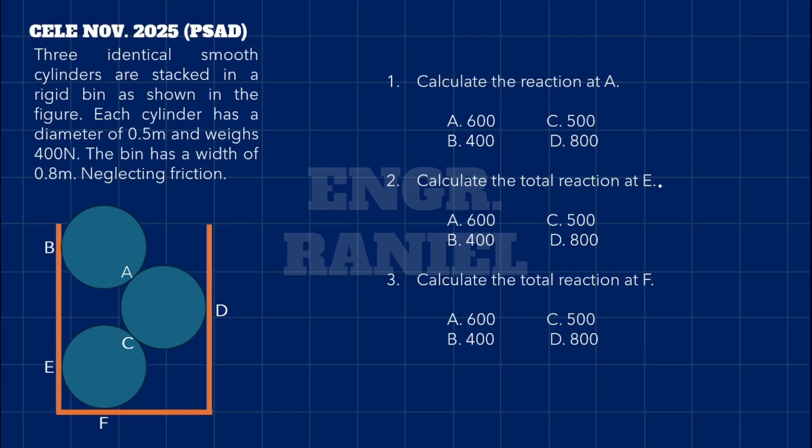May problem tayo dito na lumabas noong CELE November 2025 under PSAD. So ito yung problem guys, and ito yung given na figure. So ang sabi sa atin is may 3 identical smooth cylinders are stacked in a rigid bin as shown in the figure. Each cylinder has a diameter of 0.5 meters and weighs 400 newtons. The bin has a width of 0.8 meters and neglecting friction. Ito yung mga katanungan guys. Calculate the reaction at A, calculate the reaction at E, and calculate the reaction at F.

So, proceed muna tayo sa number 1. So, ang unang gagawin natin dito guys is i-connect natin yung mga center ng cylinders. Ganyan. So, alam naman natin na ito is 0.5 meters. Diba? Kasi ang diameter daw ng cylinder is 0.5. So, if from center of the circle to here, that is the radius, and from here to the center of the circle, that is also the radius. So, radius times 2, that is equal to the diameter.

So, connect din natin ito dito sa baba para makuha natin itong theta na ito. So, ang problem natin dito guys is ano ang measurement nitong x na ito. So, alam naman natin, diba, from here to the center of this circle is 0.25 meters, which is ang radius. And then, from here to the end din, ito ay radius din. So, ang makukuha natin dito is ang x is equal to 0.3 meters. Kasi, ang sabi sa problem, ang width daw ng bin is 0.8. So, 0.8 minus 0.25 and then minus 0.25, that is 0.3.

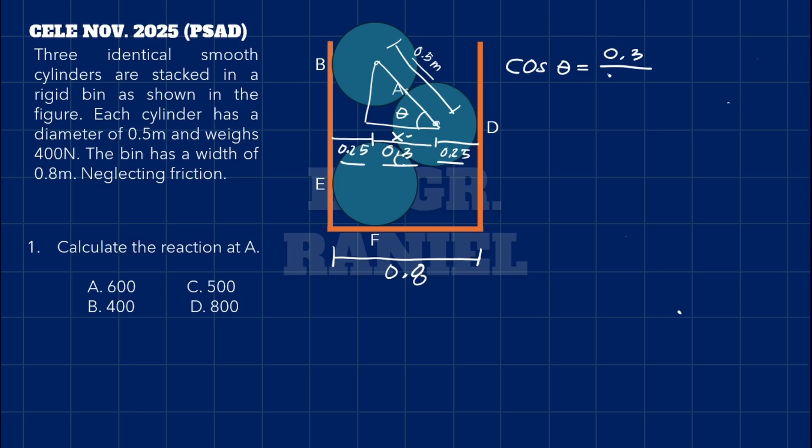So, makukuha natin theta dito guys is cosine lang tayo. Cosine theta is equal to adjacent, which is yung x na 0.3, over hypotenuse na 0.5. So, makuha natin theta dyan guys is approximately equal to 53.13 degrees. So, bakit natin kinuha yung theta na yan? So, if i-isolate natin tong circle number 1, ganyan, diba? So, ito yung center. Alam natin na ito is 400 newtons based sa given sa atin. So, ito yung A guys. So, may reaction dyan na lalabas. So, ito yung RA. And alam naman natin na ang theta dito is yung nakuha na natin.

So, ito yung RAY, Y component ng RA. So, ang gagawin na lang natin dyan guys is magsasum up tayo ng forces along Y. So, summation forces Y equal 0. So, 0 is equal to RAY, which is RA sin theta. So, RA sin 53.13, and then minus 400 newtons. So, ang makukuha nating RA dito guys is approximately equal to 500 newtons. So, yan na yung answer sa ating number 1.

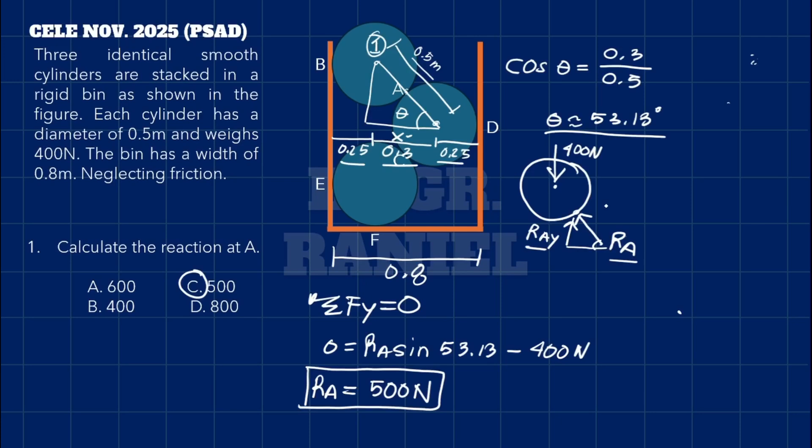So, let's proceed to number 2. So, ang question is calculate the total reaction at E. So, ang unang gagawin natin dito guys is kunin muna natin yung reaction sa C para mag-summation forces X na lang tayo if isolate natin tong cylinder 3. Okay? So, ang unang gagawin natin dito is isolate natin tong cylinder na ito. Yan. So, alam naman natin na nakuha na natin yung RA kanina, which is equal to 500 newtons. And then, alam natin na ang weight ng cylinder na ito is 400 newtons. So, nandito yung RC guys.

Okay? So, kunin natin ulit yung theta ng C. So, connect natin ulit tong center ng circles. We know na ito ay 0.5, di ba? And this is 0.25. Ito ay 0.25 din. So, matitira dito is 0.3. Kasi ang given is 0.8 daw ito. Okay, so parang same lang siya sa number 1. So, makukuha natin yung theta dyan, 0.5 ito, 0.3 ito. So, ang theta dyan is 53.13 degrees. Cosine lang na function guys.

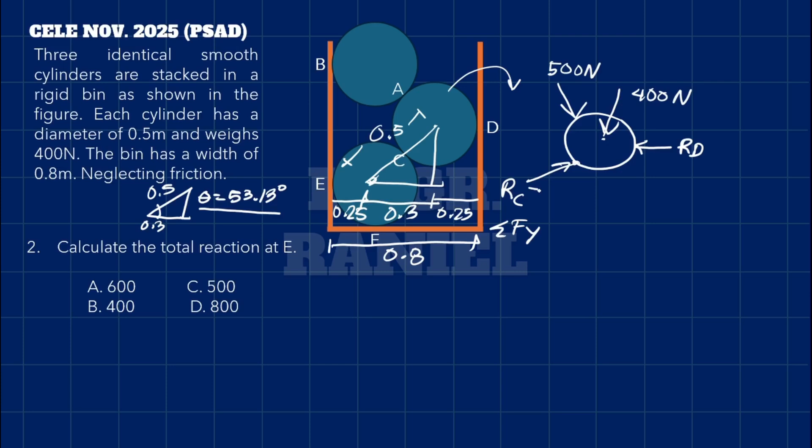So, ang gagawin natin dito sa FBD na ginawa natin is summation forces tayo along Y. Kasi meron pa tayong RD dito. Okay? So, hindi natin alam ang RD, and this is along X. So, magsa-summation forces Y na lang tayo. So, summation forces Y. So, itong RC guys is meron siyang Y component na RCY. And alam natin itong theta na ito. Okay? So, this is equal to 0.

Unahin na lang muna natin yung RCY. Ang RCY is equal to RC sin theta, which is nakuha natin kanina na equal to 53.13, minus 400 and then minus 500 sin 53.13. Okay, that is also equal to theta, which is equal to 53.13. So, makuha natin RC dito guys is equal to 1,000 newtons.

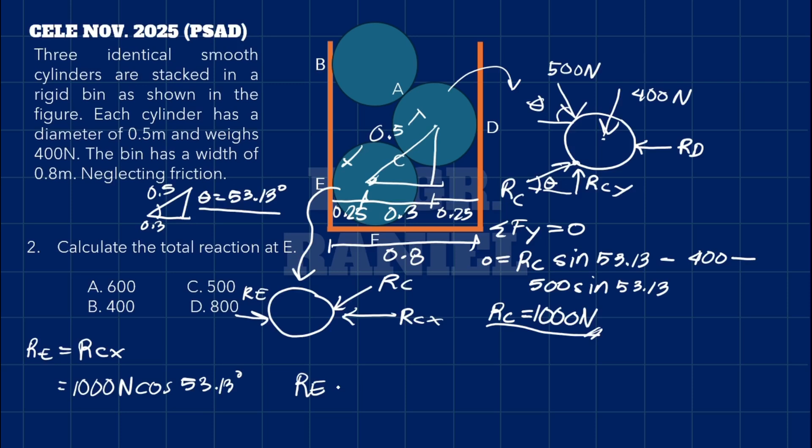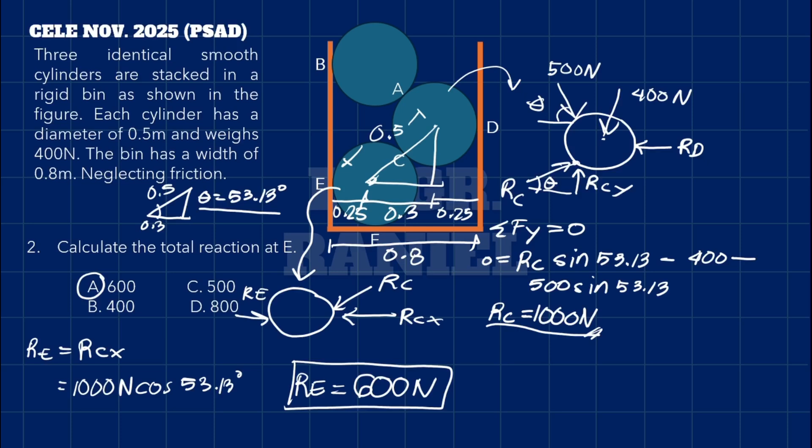So, ang huli natin gagawin is isolate natin tong cylinder na ito. So, may RC dito. Diba? RC yan. And then, RCX ito. And ito yung E, diba? Ito yung RE. So, based from the figure, guys, alam natin na ang RE is just equal to RCX. And from this figure, ang RCX is equal to RC, which is 1,000 newtons, cosine theta, which is 53.13 degrees. So, makuha natin RE guys is equal to 600 newtons. Ito yung answer sa number 2. That is letter A. So now let's proceed to number 3.

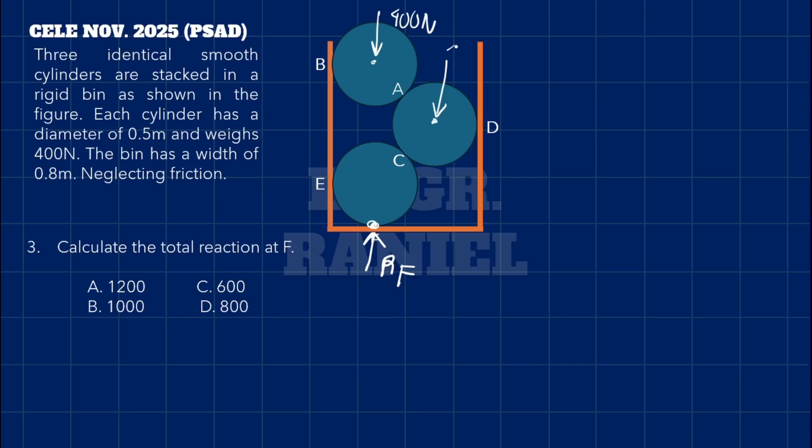So ito na yata yung question during our board exam noong November 2025 na pinakamadali. I consider this as bonus during PSAD sa November 2025 na CELE. Kasi ang tanong is calculate the total reaction at point F. So ito yung point F guys, and denote natin yan as RF. So alam natin na ang mga weight ng cylinder daw is 400 newtons. Ito is 400 newtons din. Then 400 newtons din ito. Kasi identical daw yung mga cylinders natin. So ang gagawin na lang natin dyan guys is sum up tayo ng forces along Y. So 400 times 3, that is equal to 1,200 newtons. Diba? Ganyan lang kadali sa board exam guys. In just less than 1 minute, may answer ka na. That is letter A.